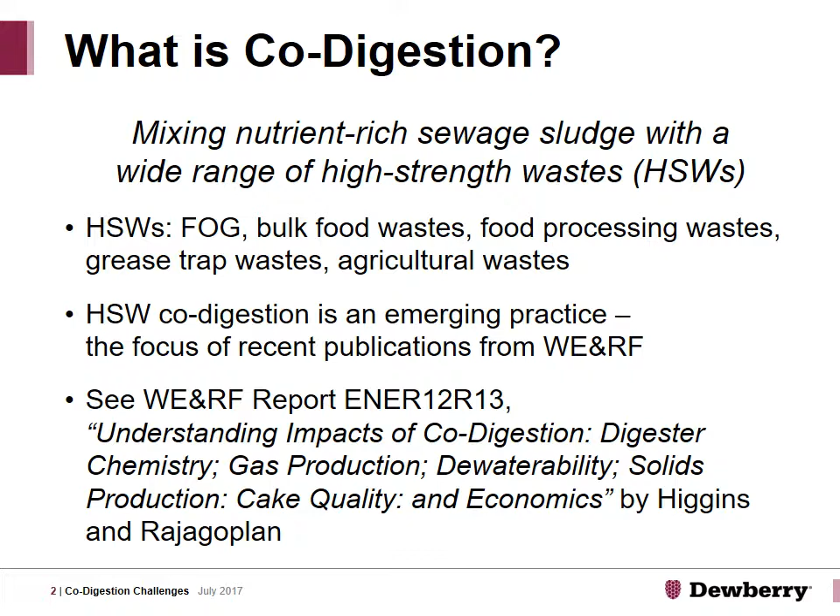High-strength waste co-digestion is an emerging practice and the focus of recent publications, as I mentioned, from WE and RF. But without those publications, you are really fraught with a very limited range of publications that you used to go to for operating experience. BioCycle, they do a good job when they get the information, but a lot of this is just happening as we speak here today. So it's new stuff. The report that I particularly enjoyed reading and having a little influence on is called Understanding Impacts of Co-Digestion. It's by Matt Higgins and his Irish colleague, Rajagoplan, who's with Kennedy Jenks. I always get that backwards on purpose.

What is a co-digestion system? It starts with collection. It can be liquid, it could be solid form or otherwise. In some cases, processing is needed to generate the feed that goes to the digester. The key point here is whatever you feed to the digester jointly with sludge solids should be paced so that changes are slow and gradual. Transitions are where the high risk is.

It's just sort of like flying a plane. It's easy to fly a plane when you're 35,000 feet in the air, but it's tough when you're landing or taking off. Same is true with the transitions in co-digestion. You don't feed part of the time and then take a break. It should be done on as continual, sustained a basis as possible. Biosolids handling afterwards is just that, but the effects from co-digestion are the subject of that report, and I encourage all of you to get that if you're interested in co-digestion. It's a great starting point.

Gas utilization, the other facet of this drawing, is an amazing area now that is getting a lot of new outlets. But if you don't have an outlet for the gas, it's going to be a very fruitless effort to try and make it all work economically. And some of the best and largest co-digestion projects in the country, like Des Moines, began with the outlet long before they had the co-digestion. So when we hear from Dennis, we'll hear what he does with the gas that's produced there.

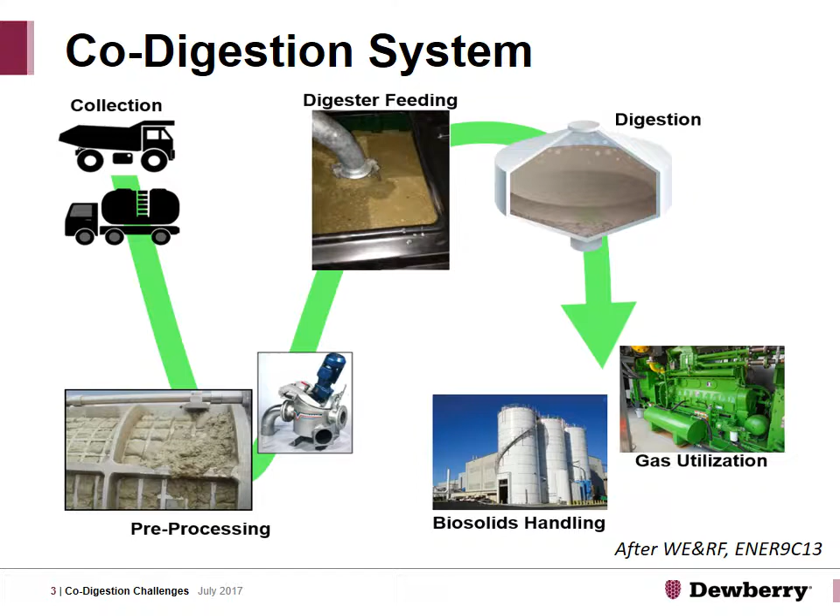The challenges are many. Here are a couple. Integration with the nitrogen and phosphorus reduction systems, and we saw some examples of that in the presentation by the CNPI folks. Deammonification via centrate treatment, orthophosphate reduction via intentional removal of struvite, before or after dewatering, also before or after digestion. That's a new extension here.

Orthophosphate reduction via chemical precipitation. As we saw in some of the diagrams, it's not a simple throw in some chemical to do something. You've got to be thinking through the entire mass balance. In some cases, we're just learning how to do the mass balances.

You need a consistent periodic delivery of high-strength waste. Storage is going to be a requirement to equalize the flows to the digester, coincidental to sludge flows. And it often requires a steady output of biogas because you've got a customer wanting to keep the boilers going or other things happening on a continuous basis. Then there's the uncertainty of energy production.

Bioenergy is nice, but in some places we are entering the age of excess renewable energy supplies. If you could believe it, California exports solar and wind energy, and they have to pay for that export because Nevada just doesn't need it. Nevada happens to be near Hoover Dam, where electrical power is quite inexpensive. And so if you don't have the whole system put together, you're going to have some challenges, and they're going to cost you a lot.

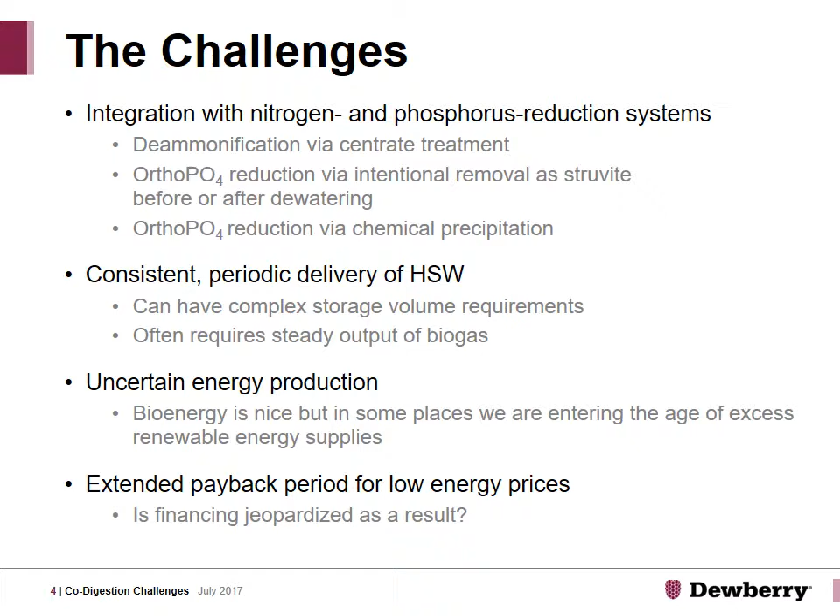And lastly, what's the extended payback period for low energy prices? Is the financing jeopardized as a result? Some more challenges: uncertainty of tipping fees. As it turns out, there's a fierce competition for the right high-strength waste. And these are the wastes that don't overload the nitrogen or phosphorus incoming to the plant and in the recycles to the plant. We could all name examples of places where there's not enough of the right high-strength waste.

Unexpected O&M cost incidence. I was waiting for Bill to talk about the materials issues and construction issues with Canby. They've learned a lot over the years from what they've done and applied it diligently. The same is true with co-digestion. You can get some materials in there that are going to make problems with your materials of construction, of your digester, of your piping, and otherwise. We all know that too.

Delivery accommodation. Lots of things go into it, from security to a receiving apron. What's that? A place where you can spill something on the ground and easily wash it to the drain system while getting most of the material into the storage, receiving, and metering. Billing system, tankage, heating, blending, and feed systems.

Acquiring air permits and odor controls. Exhaust air from receiving tanks is odorous at best. You've got to do something with it. That means a permit. Gas conditioning and utilization, and high-strength waste characterization, which probably should be first on this list.

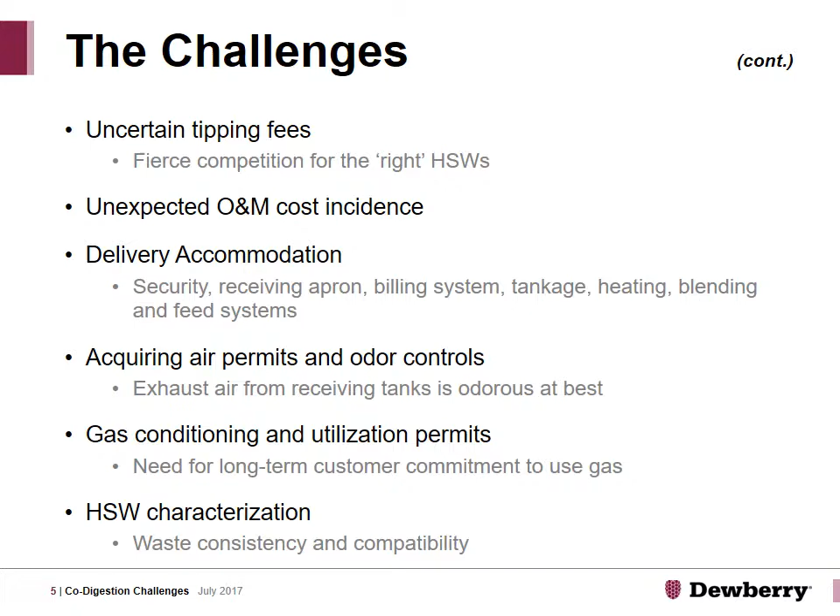This is a FOG waste receiving station for Johnson County, Kansas Middle Basin Wastewater Treatment Plant. It's a 3-tank design by CH2M. I was involved in this project a little bit at the very beginning. The concept had its beginnings in Sweden, where Gothenburg, or Göteborg, Sweden, has long had a FOG waste receiving system. It's got 3 tanks. They're mixed, they're heated. The pumps and whatnot allow blending to create the proper mix for blending again with sludge and feeding.

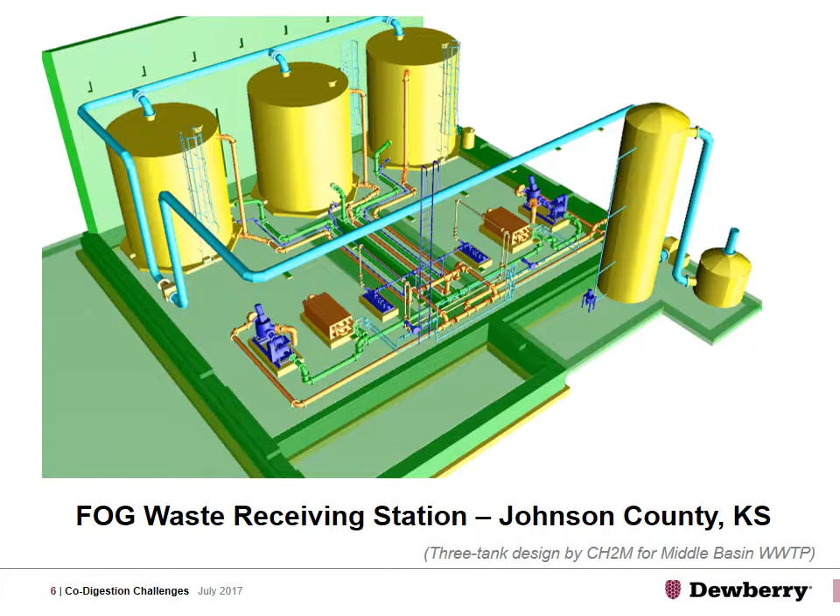The tower on the right is a bio tower, basically carbon in it, designed to treat the air that is exhausted as the tank is filled. It's all in an enclosed building, something neat and clean for the public to see from the Hyatt Hotel across the street from the treatment plant. And it's definitely not some of the simple types of tanks that you see in some of the early designs for these facilities. I won't mention any because it might be viewed as disparaging, but we've learned.

Okay. Some of the key findings from the work, WE and RF, excuse me, Jeff, I didn't mean to, I'll get that straight. Lauren Fillmore will straighten me out if you don't.

Yield stress of digestate is well correlated with volume expansion due to gas holdup. That's the most confusing expression that I have in this whole presentation. But I think you get the idea. If you have syrup and you get bubbles going into it, they're going to have a hard time escaping, and they may expand the volume of that syrup. Whereas if you have something else like Coca-Cola, it tends to relieve itself to the atmosphere above.

High-strength waste addition had very little impact on digestate viscosity and yield stress. So that's a little bit of good news. And this is really an important one. As you deal with the monovalent to divalent cation ratio as a variable, and there's been a lot of work done in places like Virginia Tech on this in dewatering, up to a ratio of about 40. That's 40 moles of a monovalent cation like potassium or sodium to divalent.

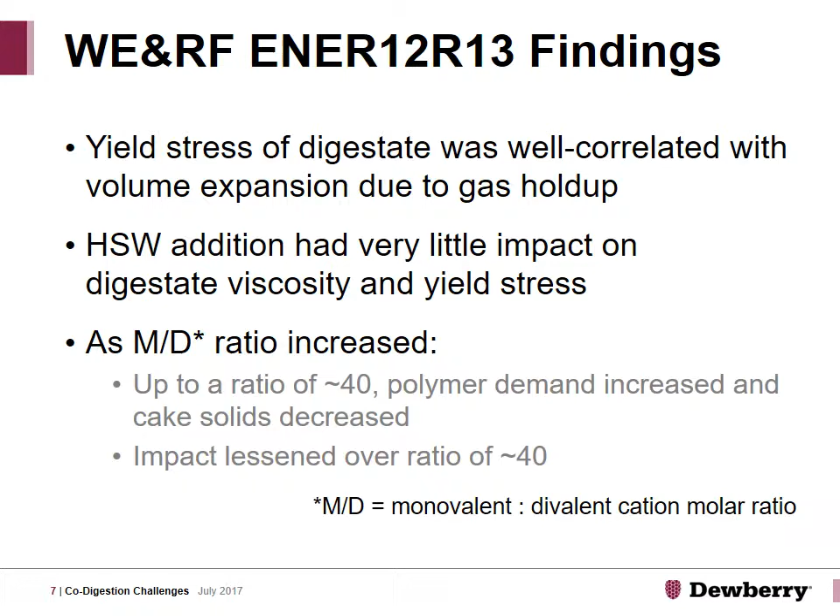You're going to see an increased polymer demand and a decrease in cake solids. And that decrease in cake solids can be a big economic factor in some places and be a deterrent to whatever kinds of co-digestion waste you might want to accept. Once you get over 40, you're way out on the curve, but the impacts are less.

In this particular case, somebody decided to feed all the sludge to a digester that did not have enough seed sludge in it, and additionally, the initial startup was around 90 Fahrenheit, and then they fixed the boiler and the temperature went up to 95, and then the gas production went from 100,000 to 200,000 to 300,000 Monday, Tuesday, Wednesday, and the roof blew. So these things happen.

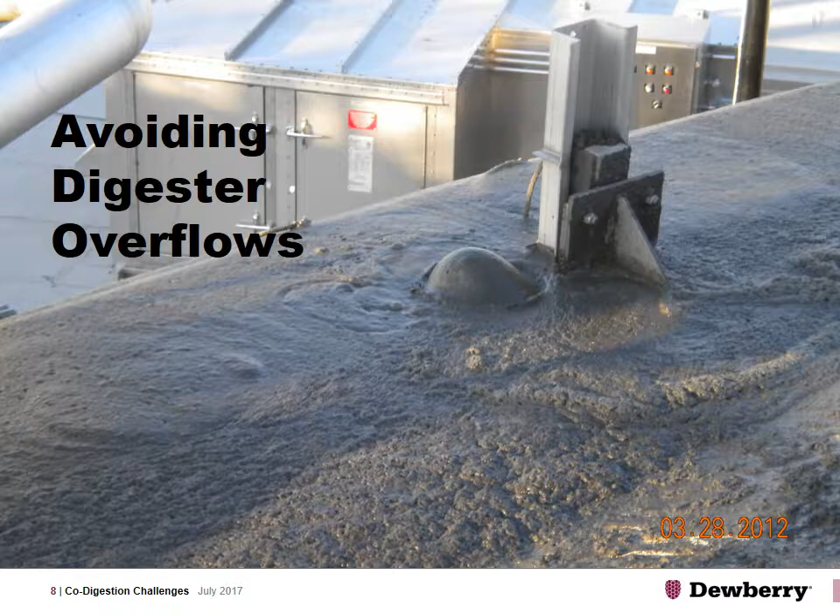Volatile solids loading rate of high-strength waste can be added up to about 20% of the base loading to a digester in the same volume. This means you can turbocharge a digester to a certain amount, like with FOG waste. I know 20% is a conservative number. I've seen it as much as 50%. But whatever you do in that kind of thing, you do it in 5% increment steps to not witness what you just saw in that picture.

And lastly, the production of odorants by the cake solids was generally lower in samples from digesters with high-strength waste added. And this really refers to a symbiotic effect that you can get with some co-digestates and sludge, beneficiating the digestion. And when you go to this WRF report, the WE&RF report, or the literature, you'll see cases where symbiotic relationships have been identified, improving the level of digestion as a result of co-digestion.

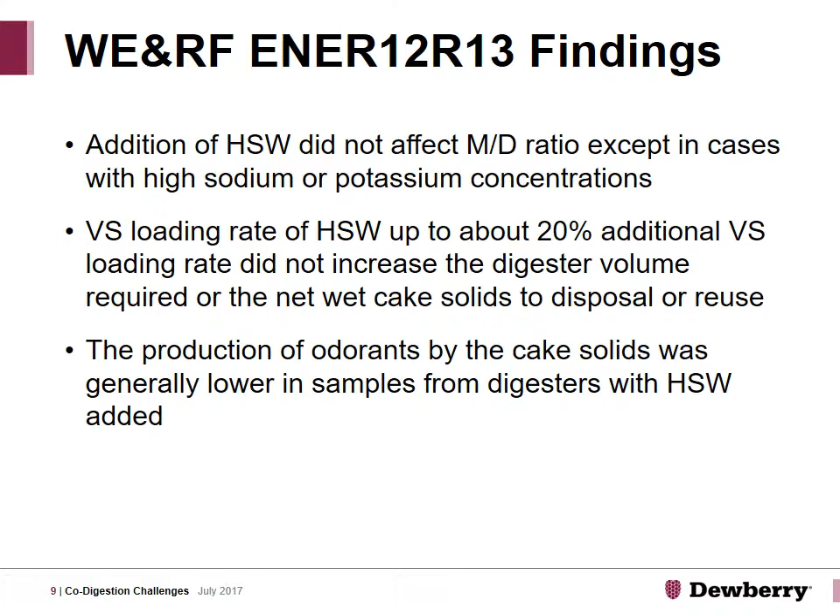High-strength waste characterization. We have to match the analytical effort to the variability of the high-strength waste. Obviously, when you have a highly variable situation, you have one strategy for sampling and monitoring as compared with consistent waste characterization where you can take a few samples and get the information you need.

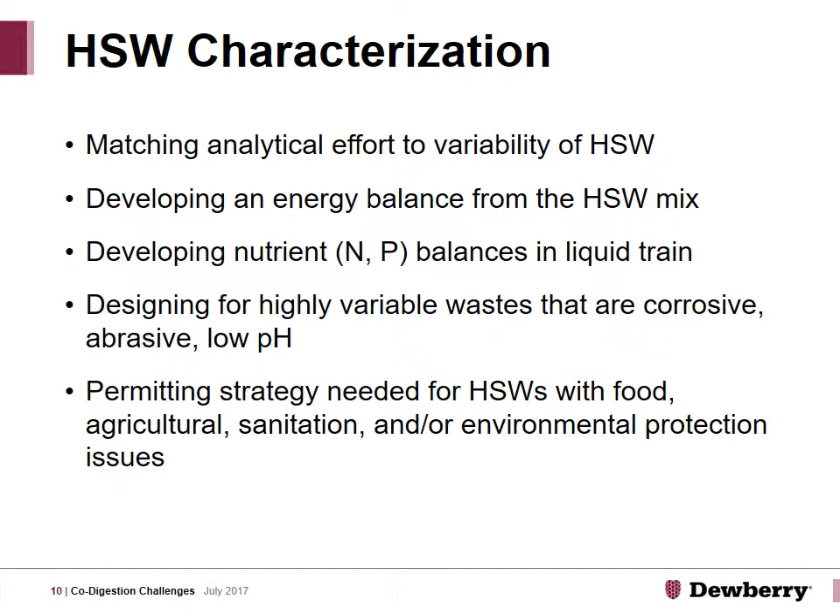All of this has to lead to developing an energy balance from the mix and developing nutrient N and P balances in the liquid train. And you have issues like designing for highly variable wastes that are corrosive, abrasive, or low pH, where you have to have essential dilution taking place to protect the integrity of the materials of construction and the like. And lastly, there's permitting strategy that is associated with characterization for high-strength waste with food, ag, sanitation, or other environmental protection issues. There's a lot of things to chase down to implement this idea of co-digestion.

Further research needs, well, things like what's the boundary for FOG addition, admixing? How much can you really take before you have to start looking at, do you have enough nitrogen and phosphorus to handle the C, N and P ratio? And this isn't an ad for Gerhard's operation there, but C, N and P, remember the old rule, 100 to 5 to 1 or something like that? It still counts in this thing, very much so.

Use of COD for routine monitoring as opposed to solids. It's another way to do it. It's strongly recommended when you get into this particular line of operation. Boundary conditions for stable operation. How far can you push the system before it becomes unstable and begins to experience volume expansion through gas holdup and the like. And then things like sustainable peak organic loading rates expressed in units of COD as opposed to solids. So you're thinking constantly in terms of a unifying factor for balances.

I guess lastly, impact of HSW admixing on dewaterability and digester foaming. All of these are things that are part of the requirement to keep an eye on things daily.

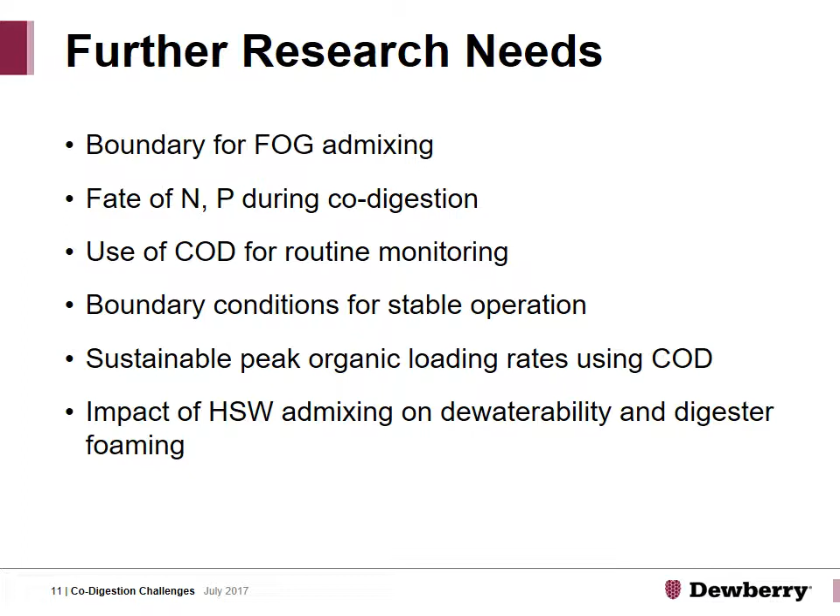So that's my presentation. It's really an invitation to you to give your card to Jeff over there, and maybe you'll get yourself a little instruction on how to get a copy of that report. I really recommend you take a look at it. It's quite a good product. And there will be several more, I think, in the years to come.